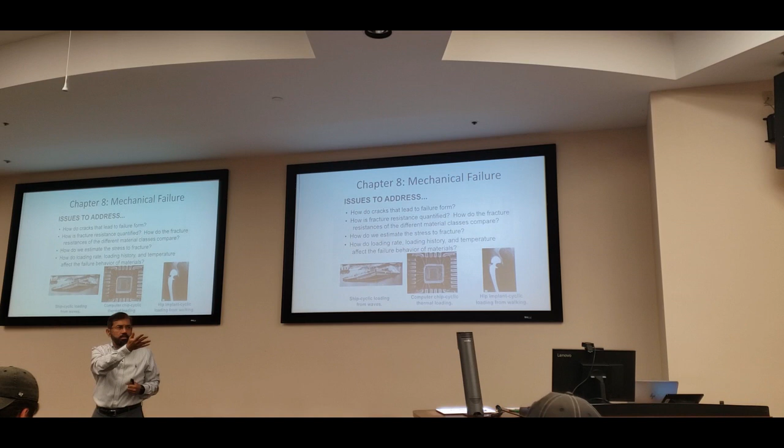So the exam is on Thursday, right? Are you prepared? I just got done studying last night. Okay, please study for it, it's so important. Your exams carry more weight, right? So please study very well. This is the time you can make up this exam. If you are behind, I told you - if you're below 60%, you should be very careful. You have 2 more exams and quizzes to go, so you need to make up with those exams and the homework.

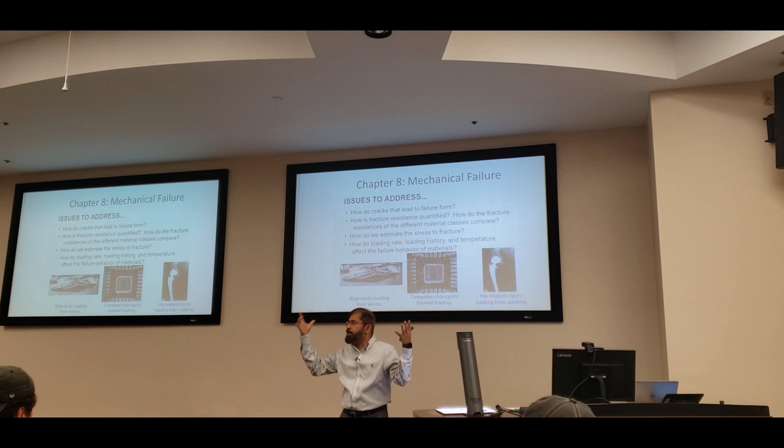Today there are 3 chapters - the syllabus covers 5, 6, and 7 for the exam. But this is also a very important chapter - mechanical failures. Why it's so important is, as I always say, as engineers you need to design structures which last, and not only last, but are safe. What are the parameters why materials can fail? If there is a fracture, a flaw, or a defect present in the material, how can that deteriorate? We'll see some examples. These are so important for aerospace - when you hear about problems with Boeing, that is the struggle. You need to be very careful.

What is another important factor? As aerospace engineers you should be aware of these things - stress and strain, to check whether your aircraft is well and good. Very important factor: always remember regular maintenance, regular servicing. That's what you're going to learn today - why regular servicing is important. As engineers you must know this. Also, what materials do you need to choose to design your aircraft? We've already learned the transition from early materials to what we use right now.

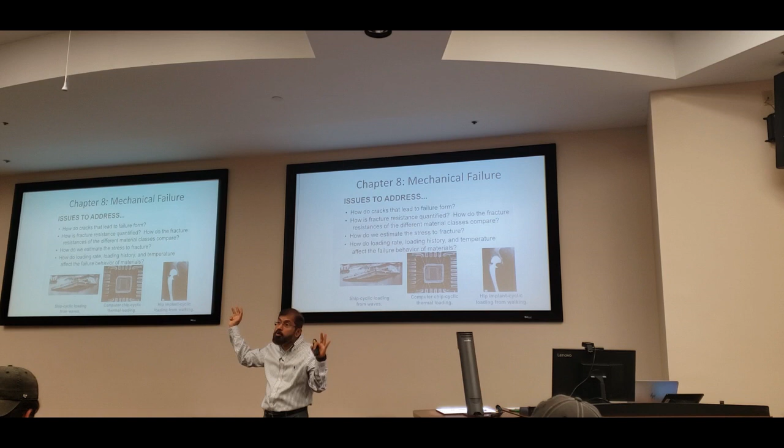There can be different types of material - one can be ductile, another can be brittle, and materials can be in between with all those properties. So material selection is a very important factor. Agree? Yes, material selection is very important. And defects in a material - you cannot avoid it, right? There can always be some defect. Even a scratch on the surface can be catastrophic sometimes. How? We're going to learn today.

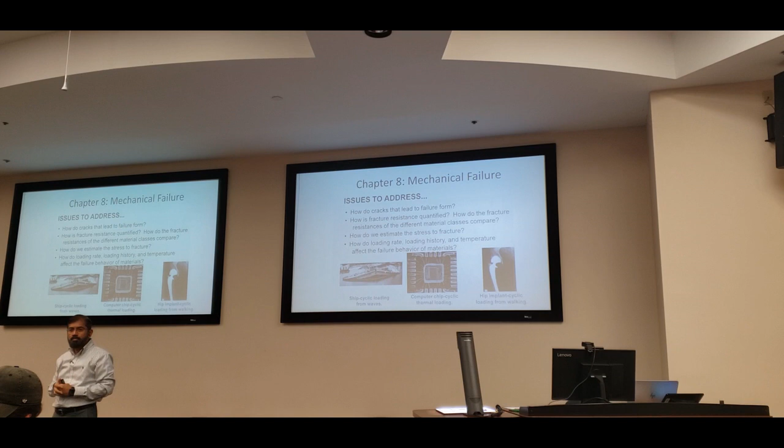If you look at this, what cracks lead to failure? Remember, there can be different types of failures, and there's a failure mechanism itself - how failure propagates, or how cracks propagate through your material. That's the important thing. Depending on what type of material you have, whether brittle or ductile, it differs. Ductile materials are forgiving materials - we can get a warning. There is always a warning for ductile materials. But what happens with brittle material? It fails right away - it cracks, that's the problem. It fails right away with no warning. So for forgiving materials there can be a warning, and a warning is always better than a sudden failure. That warning is important.

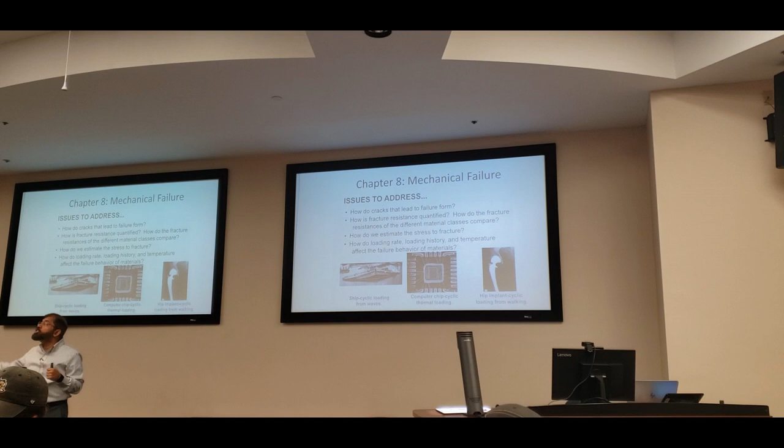What is another important factor - the ductility changes with what? Environment. Temperature is one factor, and another factor is environment - what medium, the surface conditions. Do you agree? Because in salty conditions there can be corrosion and so many other effects. Whenever there is corrosion, a pit is formed - a pit, a small hole can be generated, and that small hole can be a defect in your system.

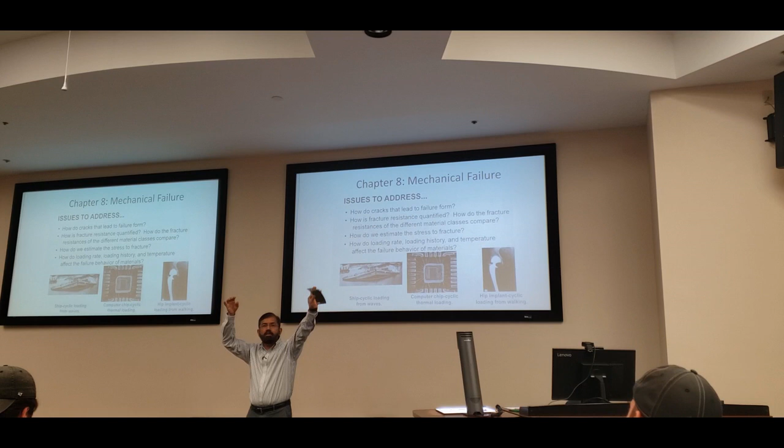Now I'm jumping a little forward, but you see a plastic coated paper - it's not that easy to tear this one, look at this. But if there is already some type of defect in the system, you can easily tear it off.

What is the message there? If there is a cut, you have seen that in snack packs, it comes with a cut. Have you ever thought about why there is a cut? It's easy to tear it apart, right? Whenever there is a cut, you can separate them very easily.

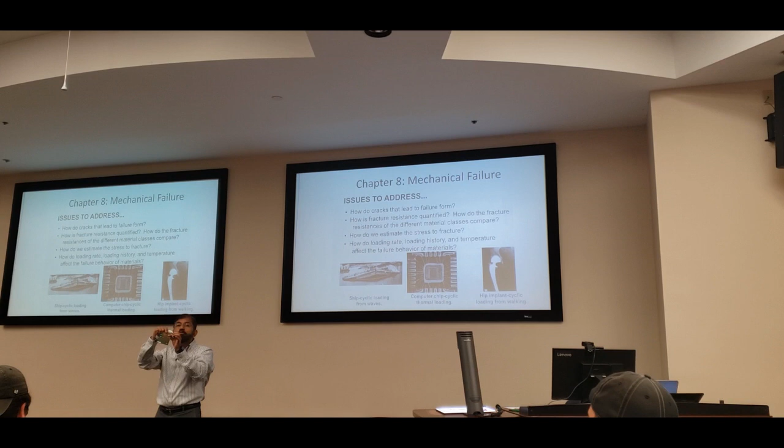One of the rare occasions where a crack is desirable. That's the take-home message: whenever there is a crack present, with lower applied stress, you can separate it. That means it can propagate much faster when there is a defect or crack in your system. That is the message. Whenever there is a crack or defect in the system, the applied stress can be amplified. You need to remember that.

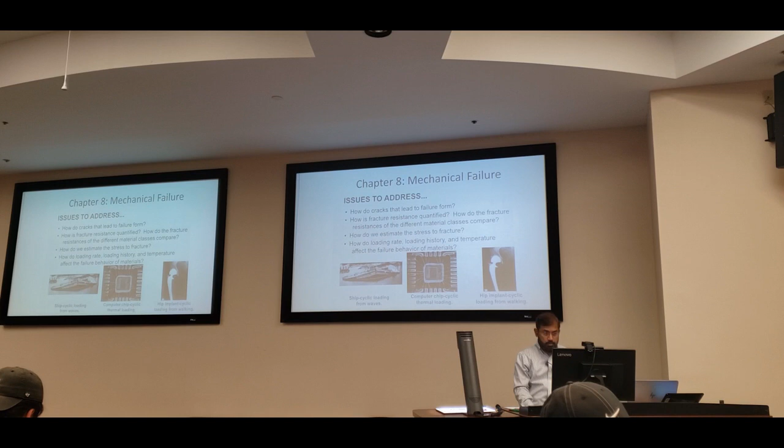So that's what we will talk about today. Look at this tanker, this is an oil tanker. I think after World War II, in the 40s or 50s, I don't remember the exact time, it split into two pieces. You see, and it was buffeting, and that split was through its girth, and it was buffeting in the sea for quite some time.

And the sea has different temperatures, right? Sometimes the temperature is very cold, sometimes not that cold. How it happened is a small crack started on the girth of that ship. And as it buffeted through that sea for so many years, what happens? That small crack expanded, and finally it ended up splitting the tanker into two pieces.

So the reason is the temperature. Whenever the temperature changes for your material, there can be a transition from a ductile material to a brittle material. Remember that, the temperature condition. So that's what happened in this case.

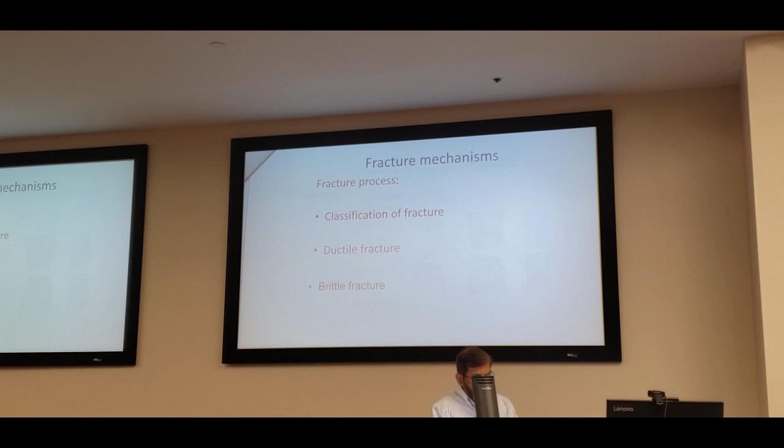So fracture mechanics is a branch of engineering itself, within materials and mechanical engineering. What are the classifications of fracture? You can see the different types: one is ductile fracture, another is brittle fracture, and then there's the fracture process.

Initially there should be a crack formation, and the crack formation is followed by propagation, crack propagation. So how do we classify a fracture? It depends on the ability of that fracture to propagate - that is the ability.

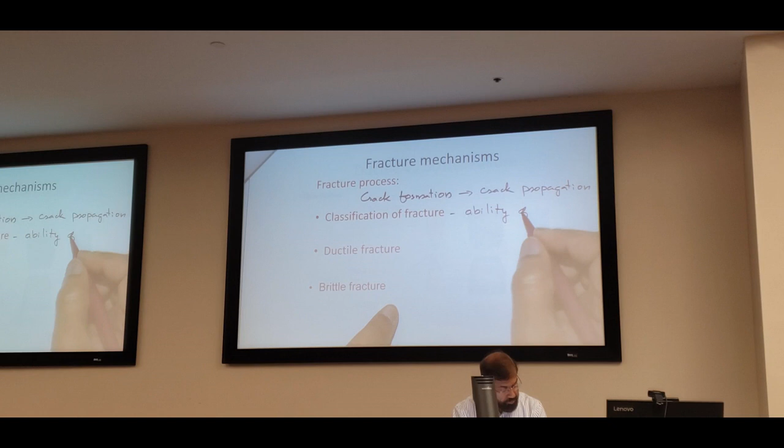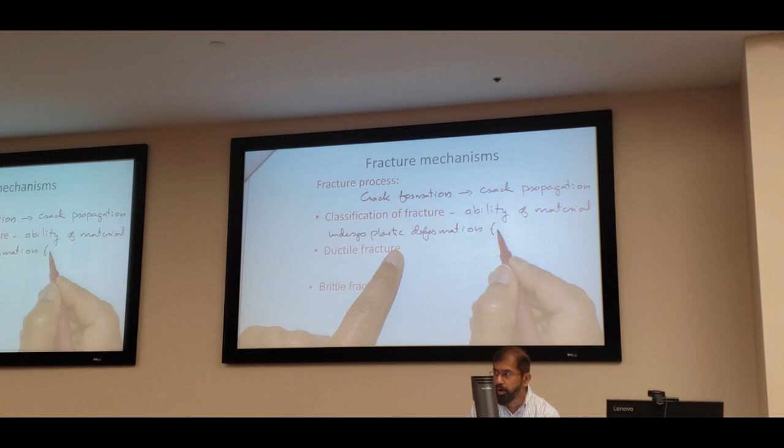This is the ability of material to undergo plastic deformation. What is the meaning of this? Plastic deformation, permanent deformation - ductility, right? Plastic deformation means ductility of the material.

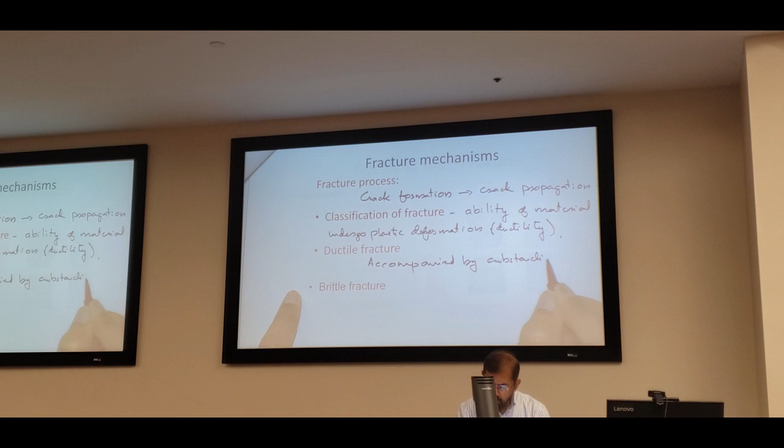So ductile fracture is accompanied by substantial plastic deformation. Here, brittle fracture shows little or no plastic deformation, and it can be catastrophic too.

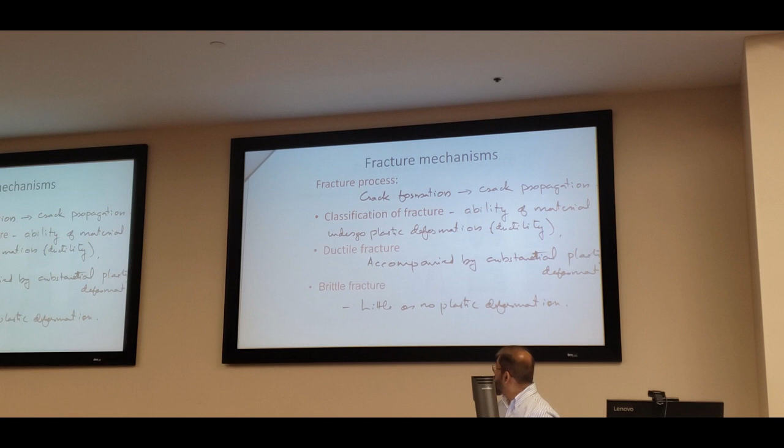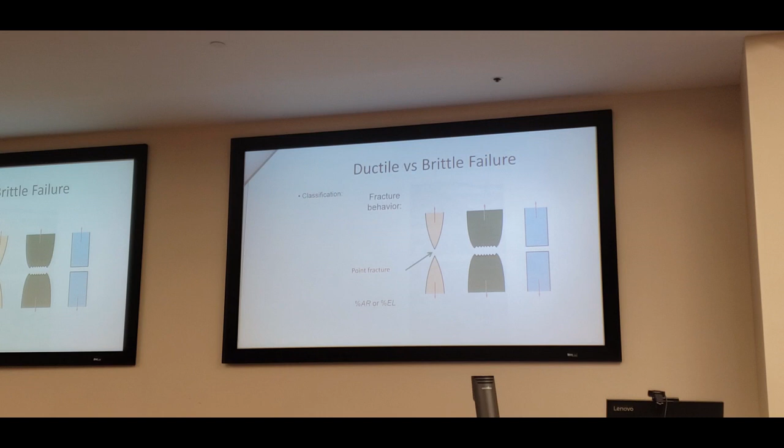If you look at a given sample - have you ever looked at your soldering wire, the material used to solder? If you pull it and apply a tensile force, you can see it coming out like plastic, and it tapers, finally coming to a point where the fracture occurs. So we can say that such a material is very ductile - a highly ductile material fails like this, coming to a point where there is separation. These are highly ductile materials.

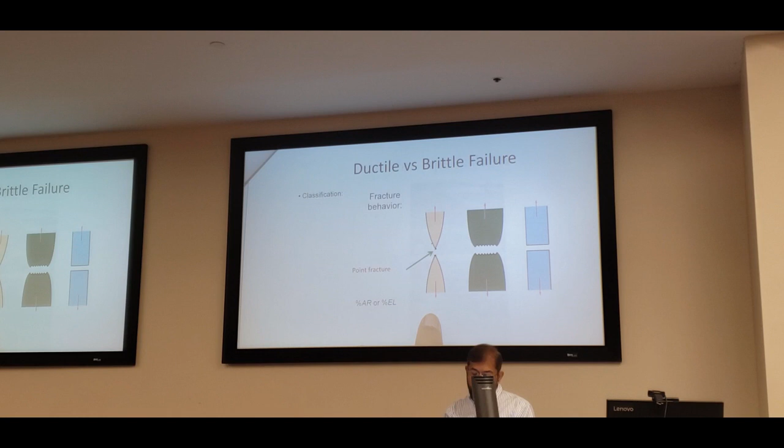For a moderately ductile material - highly ductile and moderately ductile - you can see these types of irregularities forming on the surface.

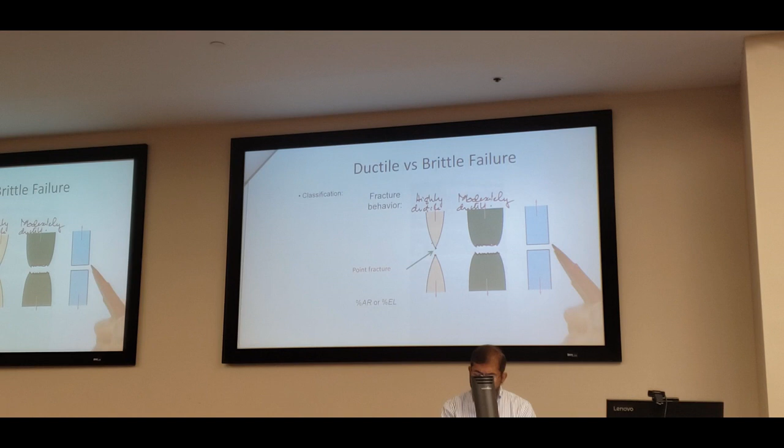And when you have a completely brittle sample, what happens? Your two ends look like that - flat, without tapering.

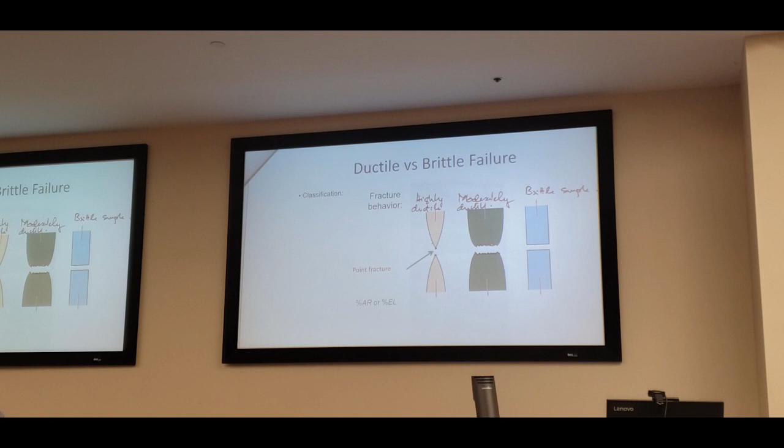So how can we define fracture in simple terms? We can say that imagine these are two pieces, and you are separating them - there is a fracture. There should be a static stress or a slowly changing stress on the sample, and it is separated into two pieces under that static or slowly changing stress. That is a fracture.

And how can we quantify this fracture to some extent? We know that fracture is based on the ductility of the material, right? Plastic deformation - so plastic deformation and ductility, how do we measure the ductility of the material?

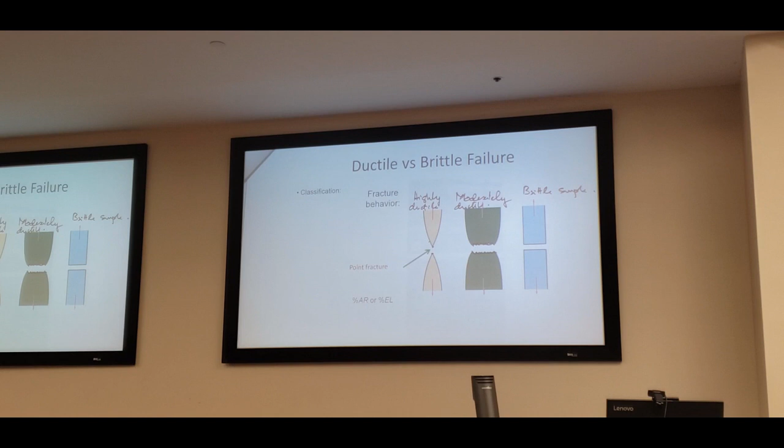Percentage elongation or percentage reduction in area. Prepare for your exam - please prepare for your exam. In the last chapter, or the chapter before that, we learned about it. What is ductility? Ductility is the percentage elongation or percentage reduction in area. Percentage elongation is the change in length over original length. Percentage reduction in area is the change in area over original area. That's the percentage reduction in area or percentage elongation.

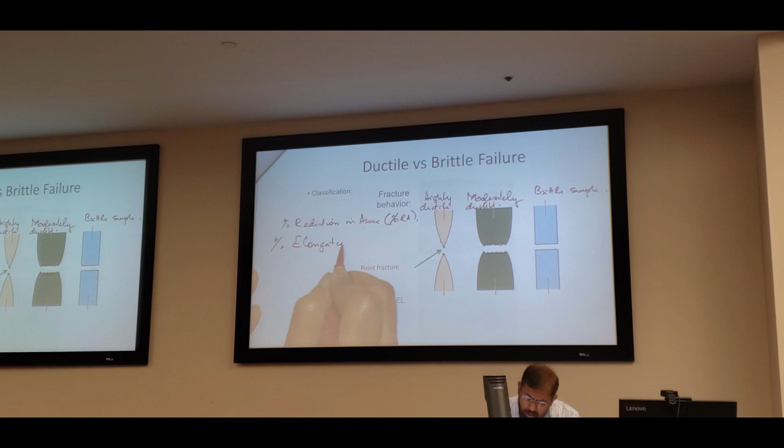See, that is the difference. Whenever you have highly ductile material, you have this type of high percentage reduction in area or more percentage elongation. When you have moderately ductile material, you can still see necking, neck formation. And finally, what you see at these edges is like a fracture in the form of teeth, teeth-like structures at the fractured ends. So here you can see more sharp ends. Got it? So far so good, right?

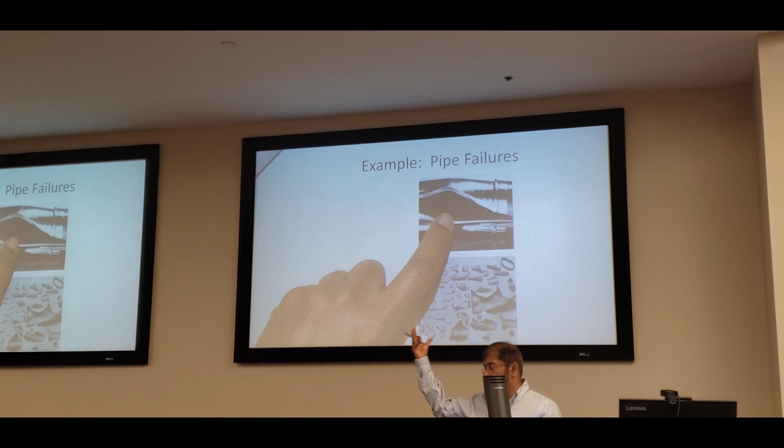And you can see in the second case, this is an example of brittle fracture, which is shattered into pieces. A very good example is ceramic. What happens if you drop a ceramic plate on a tile? It shatters. That is a very good example of brittle fracture.

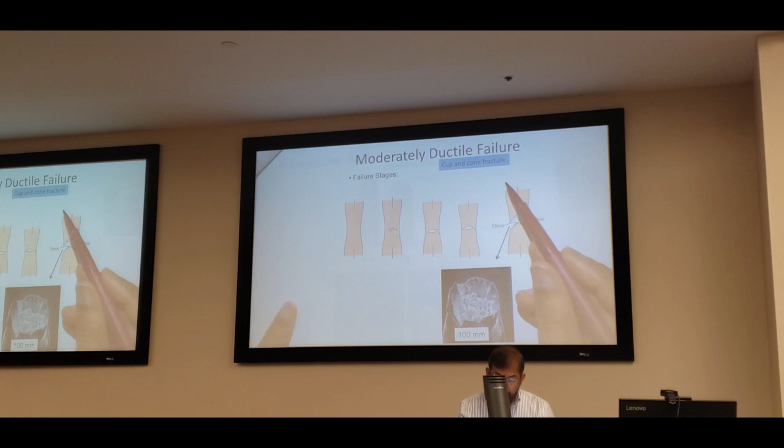Now if you look at moderately ductile failure, I already talked to you about this. This is the sample and this is the tensile axis. Initially this is the neck formation, we talked about it. You apply the tensile force onto the sample, your dog bone sample, you have seen it. We have seen the UTM video, and you apply the tensile force, and there is neck formation. Actually, within the material, what happens is you have this type of small void formation. Voids are formed.

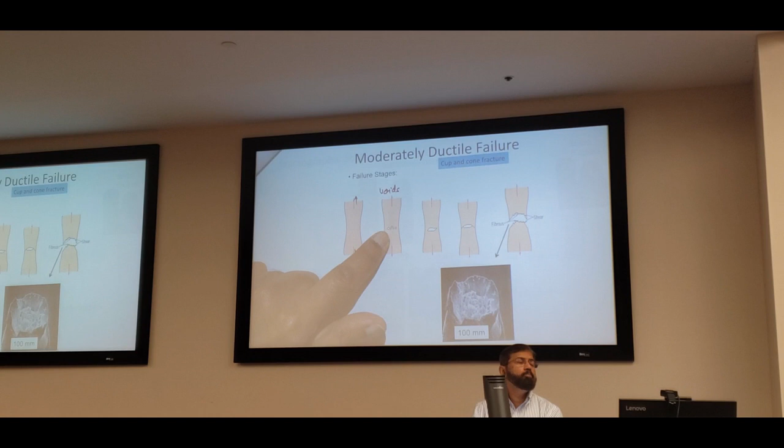Small voids are initially formed, and these voids are formed due to the breaking of the bonds. So if you keep on applying that static force, static stress, what happens? These holes, they coalesce. Agree? This coalesce.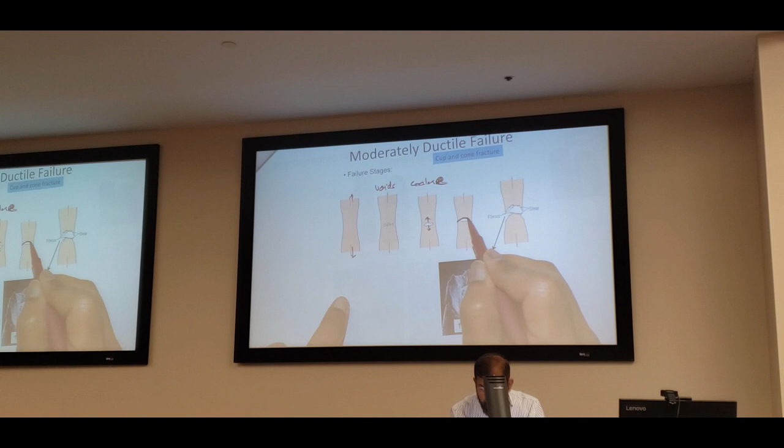And what is this angle to the applied stress axis? What is this angle? What should be this angle? You must remember these things, this is so important, you know, in the future also. 45. Who said 45? Why 45?

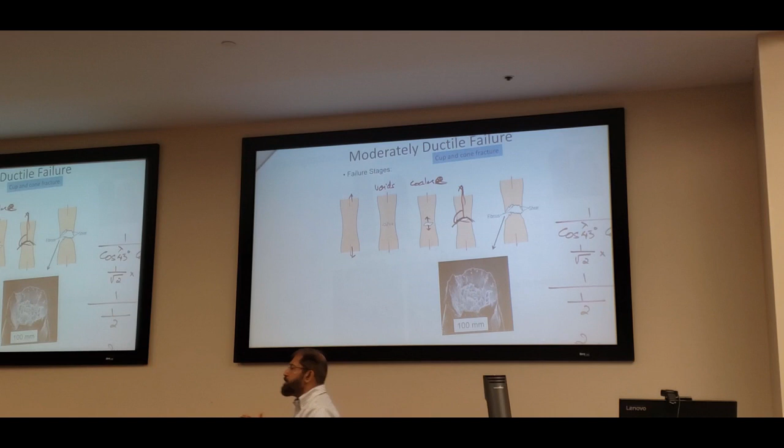45 degrees, because that is the optimal crystal plane angle. When both applied stress... in fact it's 2 times the applied stress. Remember that 45 degree. It basically comes from 1 over, 1 by square root of 2, cos 45, and cos lambda into cos phi. The equation finally comes to 1 over cos phi 45, cos 45 degree into cos lambda and cos phi 45. You must remember this. And what is cos 45? 1 over square root of 2. Cos 45, 1 over square root of 2. So it should be 2 times the applied stress. Yes, it should be 2 times the applied stress. That's the reason why it happens. And remember when I showed you that UTM, I told you, you should be careful, you should see that one. You should remember what angle the crack propagates at.

Okay, that is so important. That's the reason why it happens at 45 degrees. The lip is here at the 45 degree angle, because that's where the slip occurs. Remember, there are different planes, and one of the planes feels the maximum applied stress and starts slipping. That's the reason for this 45-degree angle.

You can see that these are the fibrous ends, so this is where you have the fibers. These are moderately ductile failure. Moderately ductile failure - it's always like this in a test where you're just doing tensile strength, applying stress in parallel.

Yeah, parallel - we apply that parallel stress, and there are two components. Whenever the phi is 90 or lambda is 90, what happens? There is a brittle failure. If the planes are perpendicular to the tensile axis, or parallel to the axis, or perpendicular to the axis, then there is a brittle fracture in that case.

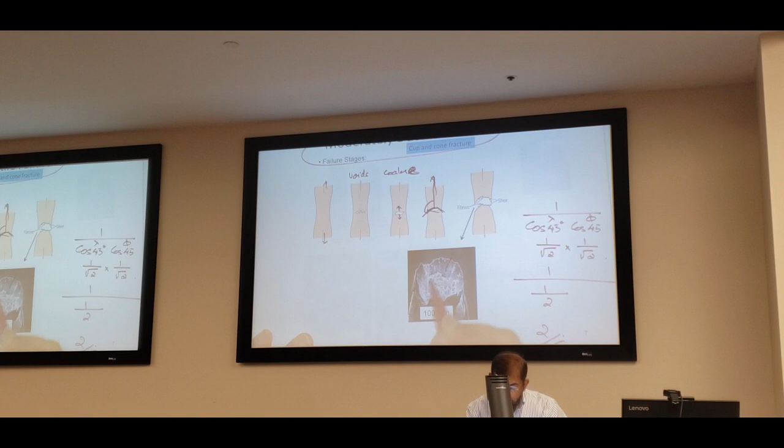This is basically a moderately ductile failure here, and this is an actual cross-sectional area of your sample. You can see the lip is 45 degrees, and you can see more grainy structure on the surface, and that is the reason why you have a moderately ductile failure. So you can see this is called a cup and cone fracture.

Look at this one. This is a cup - this part is a cup, and there is a cone. Since this is a cup, there is a cone here. The other side should be cone, and that's the reason why it is called a cup and cone structure. So the cup region is shown here where you can see the spherical dimples, and where the cone is, at the lips, you can see the elongated C-shaped dimples.

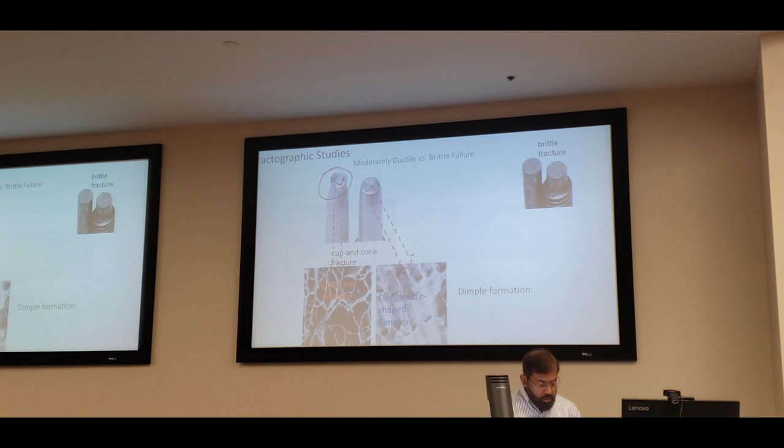So this is spherical dimples here on this side, at the cup side, and whereas on the other side you can see elongated C-shaped dimples. This is how you can analyze your failure. This dimple formation is a characteristic of uniaxial tensile failure.

Whereas in this case, for a completely brittle fracture, look at this one. What you see is not that angular separation or anything like that. You just see two surfaces, and you can see the grainy surfaces on the ends. You get it? Yes - this is the difference between moderately ductile and brittle fracture.

So this is important, and when NASA has some problems, some issues, the first thing they do, one of the important things, is get those samples - get the failure samples, and the filings and whatever particles you can collect from there. This is exactly what they do, and they analyze it to learn how the failure happens. So that's the importance, that's why it's so important for you guys.

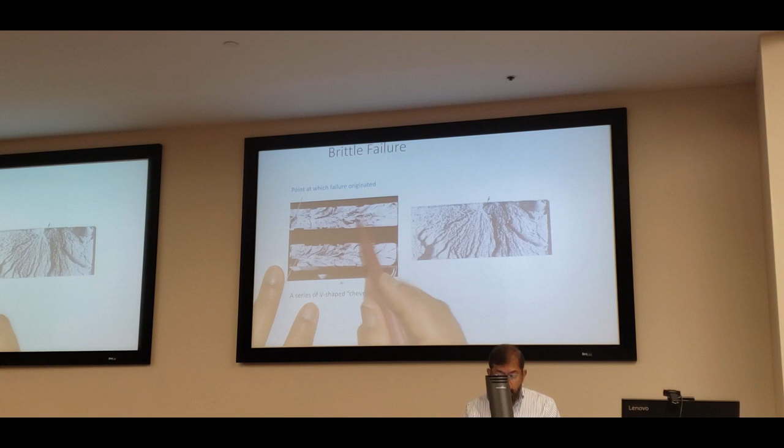This is where you have a brittle failure. You can see that you don't see this type of cup and cone structure or anything like that. Remember, this cup and cone structure is a characteristic of materials with moderately ductile failure, but for brittle failure, it looks like this one. If you look at some brittle materials, typically for steels,

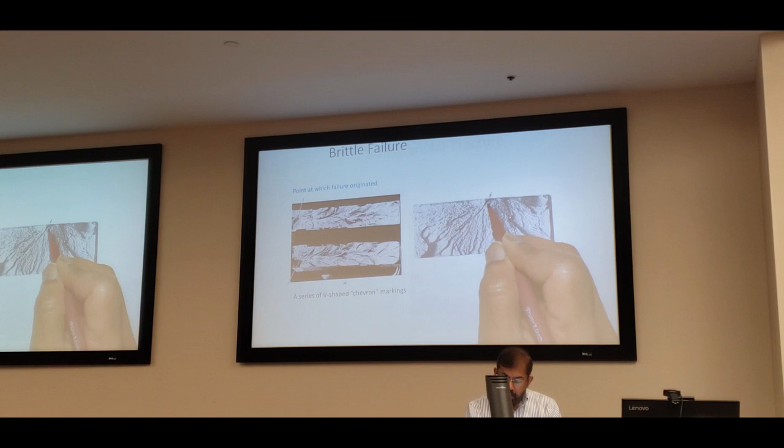you can see this V-shaped or chevron markings at the point of failure. The point where it originated - there might be a sand particle here - and then it propagated, and you can see all the V-shaped markings there. In this case also it's a fan-like appearance, with some defect somewhere here that propagated like this throughout the structure. So this type of failure you can see.

And if you look at this one, look at these surfaces - if this is a sample of this type, what is the angle? This is your tensile axis. Professor, could you slightly pitch that?

You know, the problem is this is not the right size here, so whenever I move it, you don't see it. That's the issue. Otherwise it should be this good. But even in this case, if I move to one side, it changes.

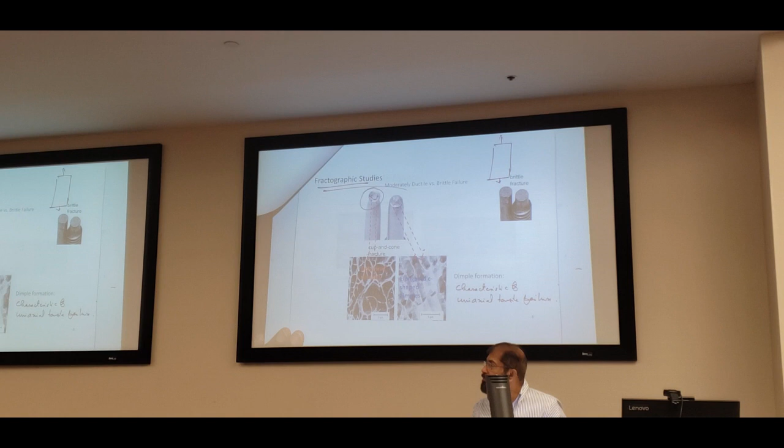I don't really understand the full difference between ductile and brittle failure. Is there a certain point where I just don't understand the separation as well? Yeah, I'm coming to that.

Okay, look at this sample. This is a sample like this one. You are applying a tensile force, and I just talked about it. For a brittle material, brittle fracture, remember in the last chapter we learned about it - what is the angle from that equation cos phi into cos lambda, 1 over cos phi into cos lambda. What happens to that one when it is 90 degrees? Brittle fracture. So it should be a brittle fracture, meaning in this case it's a 90 degree fracture.

You see this 90 degree here - you have this applied stress, and whenever your stress direction is like this one, and your orientation of the plane is typically like whatever orientation you can have, but for a brittle fracture it should be 90 degrees, yes?

90 degrees for the tensile axis - not the normal angle, right? And the plane, if it is parallel to this one, the most favorable plane is parallel to this one. Assume that this is the parallel. So normal to this one is this, right? And therefore this angle is 90 degrees.

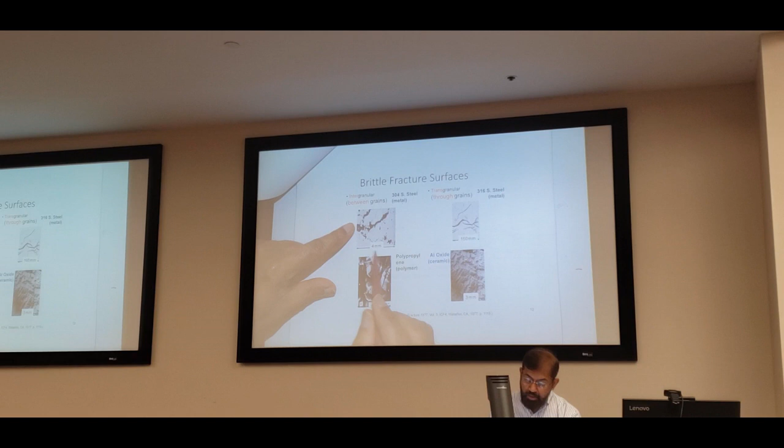Under a scanning electron microscope, you can see the surface of that one which is passing through the grains. These are the properties of different types of material. Whenever you have a certain type of steel, you can see this type of failure mechanism. These are some very good examples for intergranular failure between the grains in a 304 stainless steel metal. So you have these things here, and transgranular means it is through the grains - you see this is the grain and it happens through the grain. So these are intergranular and these are transgranular.

Aluminum oxide, ceramic - the failure happens like this. Okay? Just to see the difference between the different types of failures.

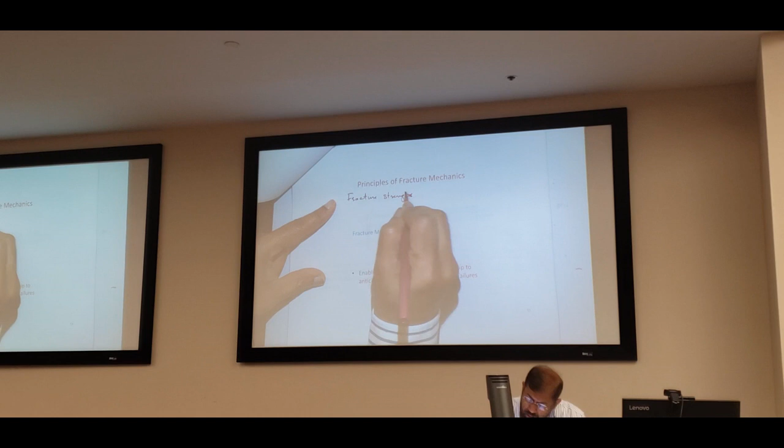So the principles of fracture mechanics is, basically the fracture strengths are much less than the theoretical strength. You can calculate the theoretical strength of the material if you know the bond energy, and from that calculation you can find the fracture strength of the material. It has been observed that the actual strength of these materials is much lower than that, and it is basically because of imperfections in the sample.

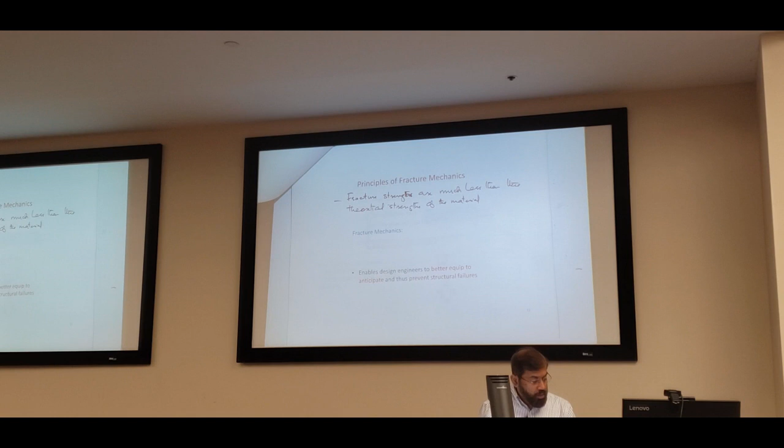So the theoretical strength doesn't consider all the defects present in the material. There can be so many defects in your material, right? It doesn't consider all the defects, and that's the reason why the fracture strengths are much less than the theoretical strength.

So fracture mechanics is the quantification of the relationship between material properties, stress level, presence of crack producing flaws in the material, and the propagation mechanism, and so on.

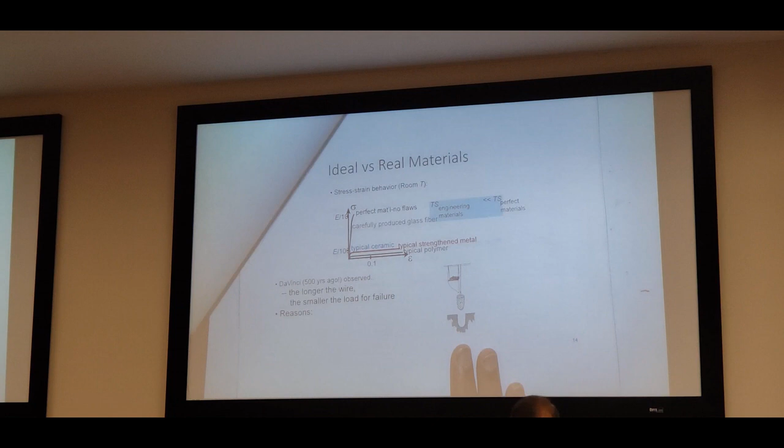And you can see that this has been noticed long back. Da Vinci, 500 years ago, himself observed that when the rope is longer, the chances of failure increase or decrease?

Increases. Can you go back really quick so I can take a picture? Back to the previous one? Yes, please. Thank you.

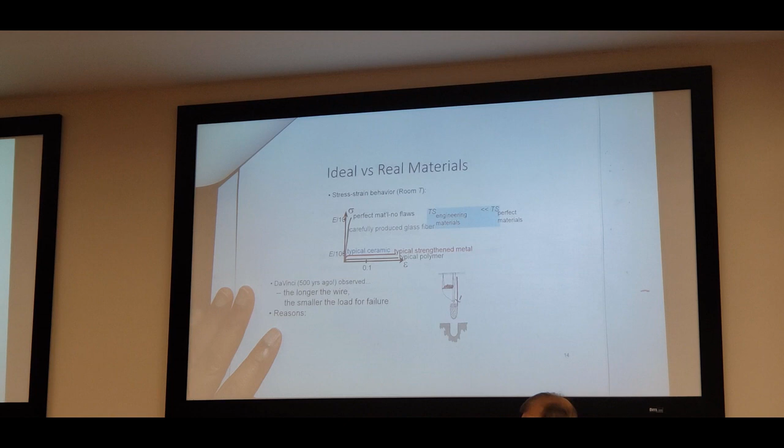So basically, as the length increases, what happens? The number of failures, the number of flaws increases. Agreed? Number of defects increases. So as the number of defects increases, what happens to the mechanical strength of that material? Decreases. So he observed these things 500 years ago.

That is the reason why the longer wire has a smaller load for failure, because there can be a lot of defects in the sample, and it has a larger number of defects. So it can cause premature failure.

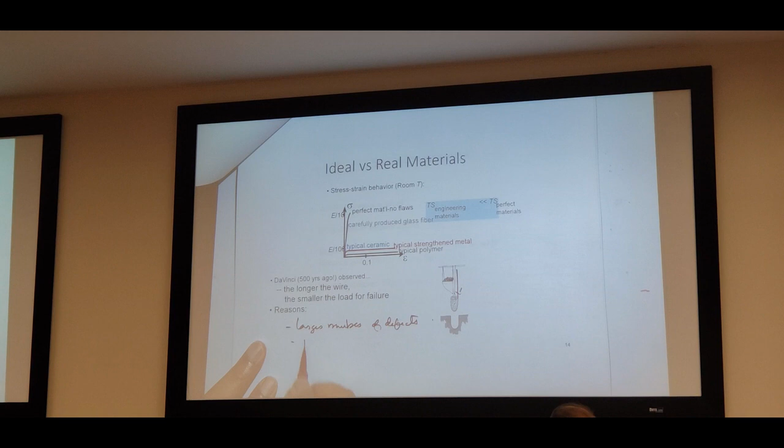So from this plot itself, modulus of elasticity, or applied stress versus strain - you can see that this is a perfect material with no flaws, and when you have a carefully produced glass fiber and a typical ceramic, what is the strength of the material? So the actual engineering material's tensile strength is much less than the perfect material. And remember, there is nothing like a perfect material - there can always be some defects in your material. So the perfect material here means the theoretical material without any defect.

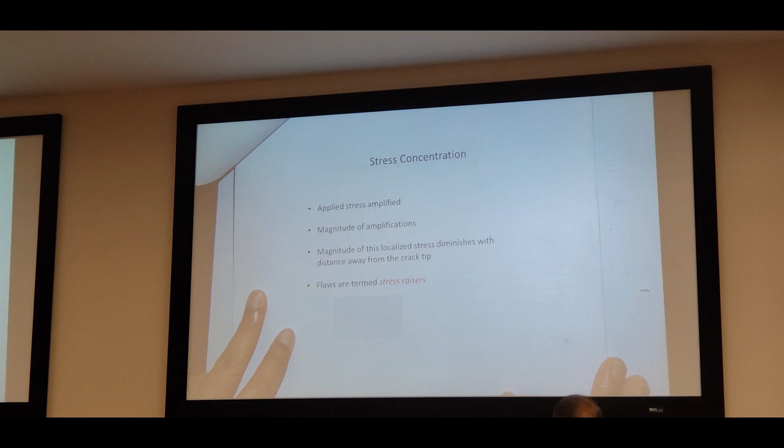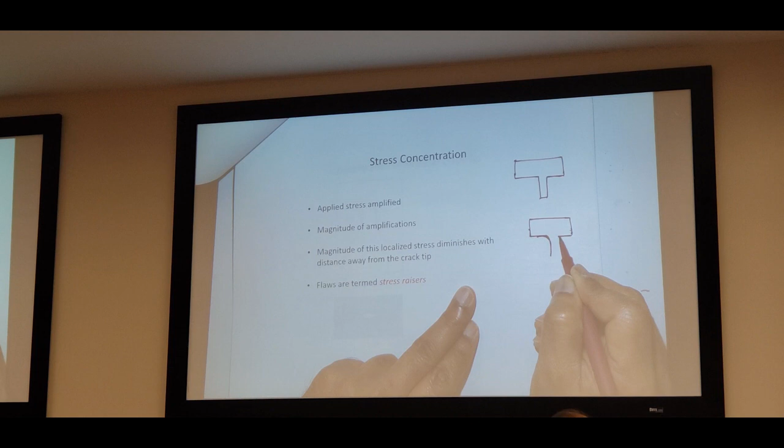So let me ask you this question in advance - I'm jumping ahead, but if you have a structure like this, where you have a joint, or a T-type structure, and another structure, this diameter and this diameter are the same, the cross section is the same, and all other factors are the same. There is a curvature here between this one and here, and there is no curvature here - there are sharp ends here.

My question is, when you apply a tensile stress onto the sample, some type of load on the sample, which one is stronger? The one with the curves, the one with the rounded edges? Exactly. Any other answer?

And why is this stronger? Yeah, it's - I'm not saying it's wrong or anything. Yes, with the first one. It was first like one? Yeah, it would cause a brittle fracture, because it's just straight, like 90 degrees, the corner, versus the other one - yeah, it's spread out.

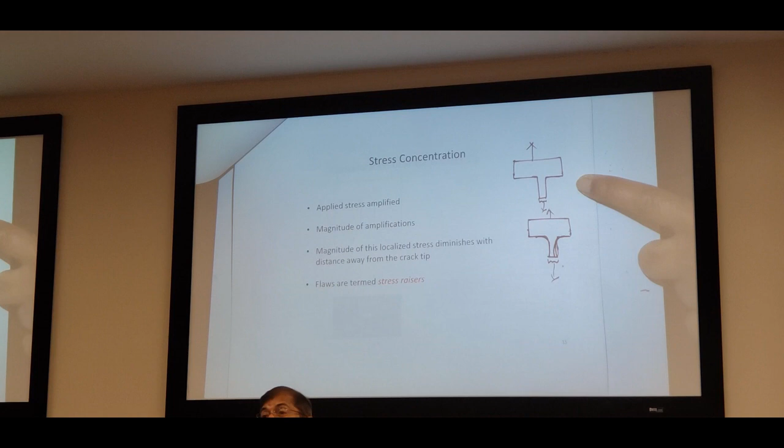Yes, again it's partially correct, with respect to that angle and those things, but whenever there is a defect in your system - we are coming to that, but that's the reason I am jumping ahead. So any other answer, but I will explain it only after the next few slides what is the reason, and you can easily see the reason. Any other answer?

You know, this is just to make you think. That's the only reason I am telling it right now. I am asking it right now.

Is it because it's already shaped in the way that it already wants to move in that direction, so it's easier to distribute our loads? That might be great.

Okay, any other answer? For the curved sample, there's less surface area, so lower concentration of defects along the surface of it.

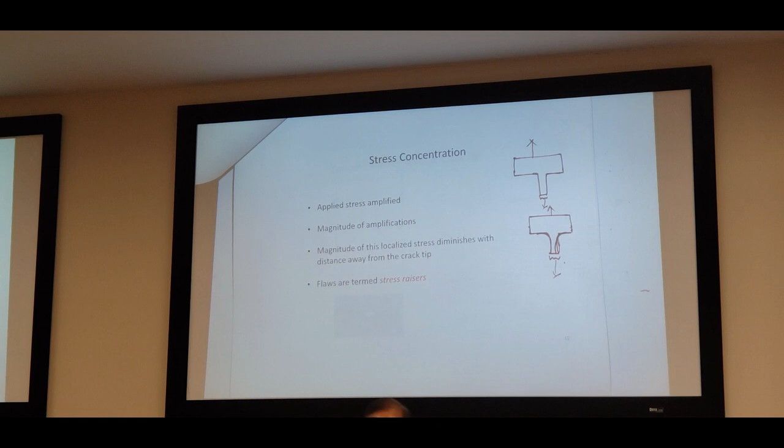We are not talking in terms of the surface area. Okay, not in terms of surface area. We are talking in terms of the angle itself, which I don't want to comment on, whether it is correct or not. That's the reason why I don't want to comment on it, whether with respect to that surface area and the defect, what you said, defect is more towards our answer.

But about the surface area, yes, surface area is important if you have defects on the surface of the sample. That's why I'm not saying it's incorrect, but if there are defects present, yes, it can be. The curvature, the surface area - what you said is true with respect to that. When you have more surface or more length, you can have more defects in the sample. But the actual answer is different.

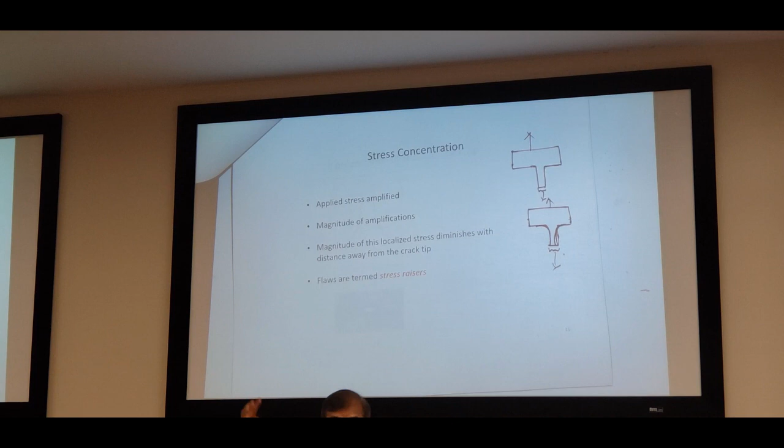And then the top one, there's a weak point in that corner. Okay, and then you're kind of transferring that. Yes, you are coming to that point, that's why I'm asking you. There is a weak point for the first one, right? And why that is going to be weak, we are going to learn this.

For the first one, those square corners can allow for a higher stress point, which can then allow, if any defects occur there, the corners to more easily allow that defect to propagate. Yes, these are all correct answers, okay?

You're coming towards that real answer, and what is the reason we are going to see in the next slide. So you have the applied stress amplified - forget about this one, okay, I just drew it there, that's all. But applied stress is amplified whenever there is a defect there.

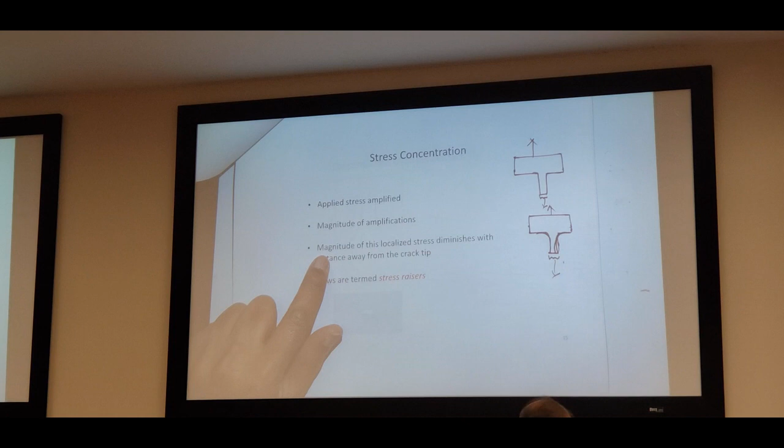And the magnitude of amplification depends on how much stress is concentrated and how fast your defect propagates - that depends on the magnitude of amplification. And this magnitude of amplification depends on how the cracks are oriented, and its geometry.

Okay, and the magnitude of this localized stress diminishes with the distance away from the crack tip, and flaws are termed stress raisers. Whenever you have a defect in your sample, that defect is called a stress raiser. The flaws are always termed as stress raisers.

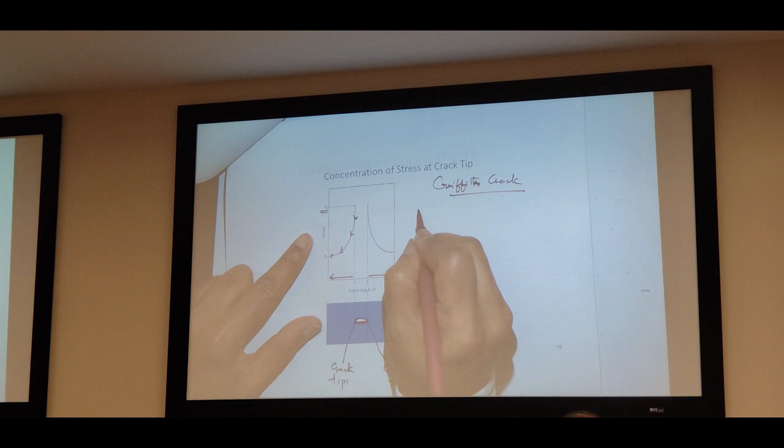And the maximum stress sigma m, that is the maximum stress sigma m, is equal to 2 into sigma naught into square root of A over rho t. And what is the rho t?

If you go to the next one, you can see the equation: sigma m is equal to 2 into sigma naught into square root of A over rho t.

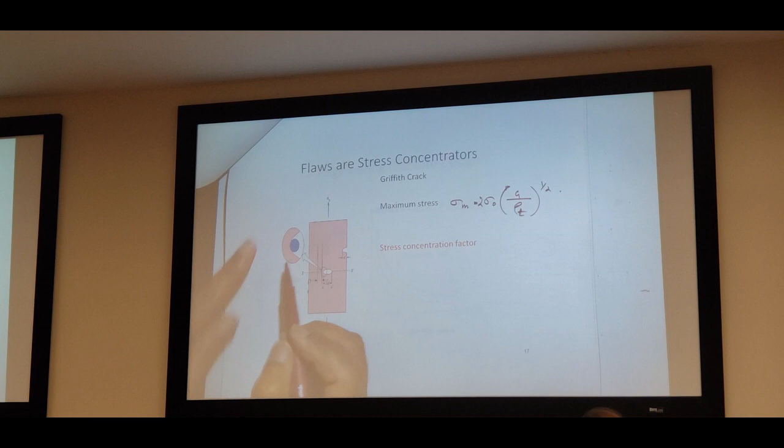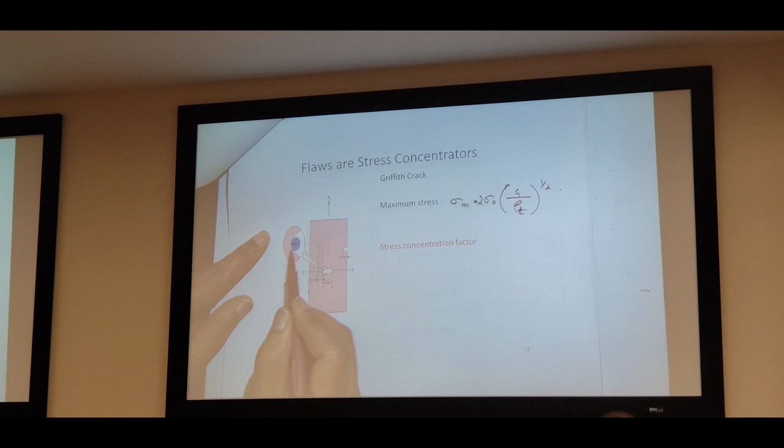And rho t is nothing but, you can see here, this is that crevice or the flaw. If you take that side and fit a sphere or ball there, the radius of that ball or sphere is rho t.

So what is sigma naught? The applied stress. And what is sigma m? The maximum stress, that is the magnified stress. So what happens as rho t decreases? Look at the equation. As rho t decreases, sigma m increases. Just that.

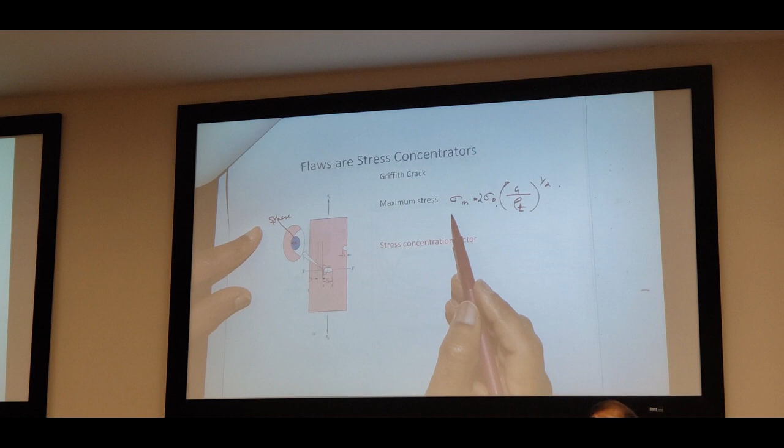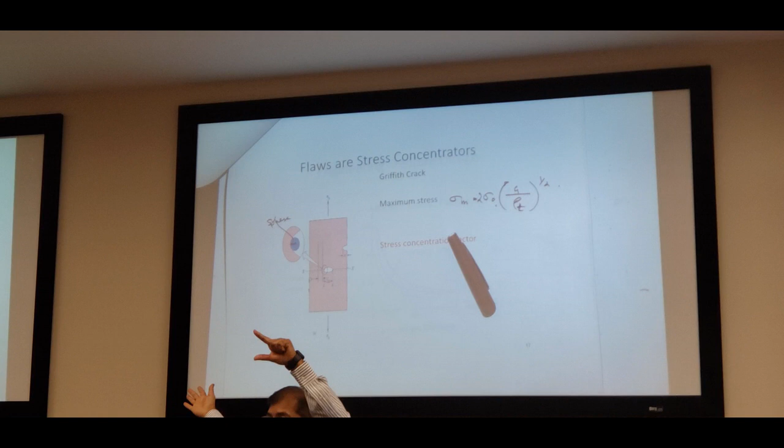Sigma m increases as rho t decreases, which means since this is the circle, this radius decreases. What is the meaning of the radius decreasing? Consider this, if you put a ball here, the radius of that ball is rho t. As the flaw becomes sharper and sharper, the radius of the ball decreases to zero.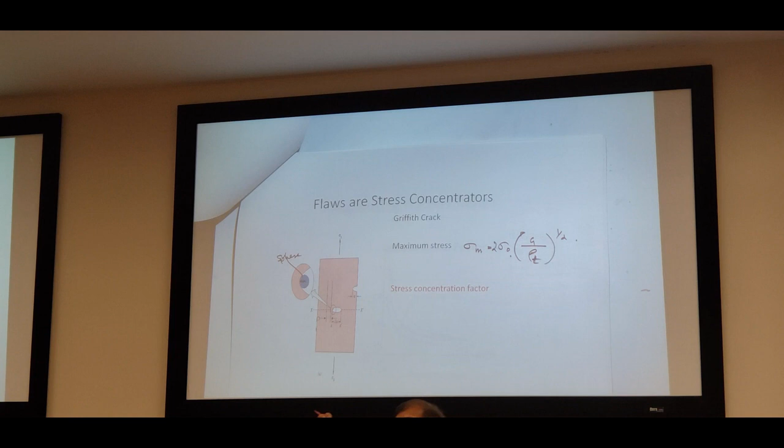So as the crack becomes sharper and sharper, the applied stress is amplified more and more. That is the meaning: as the sphere becomes sharper and sharper, sigma m, the maximum stress, increases. Therefore, as this becomes sharper and sharper, it requires less applied stress for that crack to propagate.

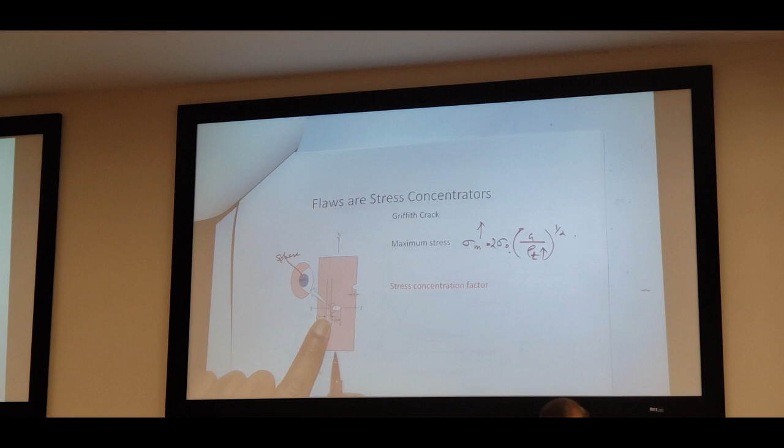You mean decrease, right, on the rho? Where, which one, the rho on the formula? Yes, decrease, right? Sorry, this is decreases. As rho t, that is the radius, decreases, sigma m increases.

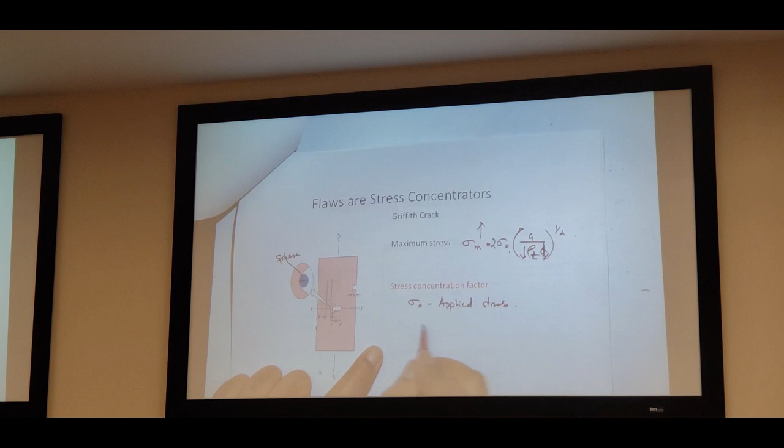So sigma naught is the applied stress, and sigma m is the maximum stress. What is A? Please listen here, I didn't define A. This is the length of that flaw. The total length is 2A for a completely inside flaw, where the flaw is completely inside the sample.

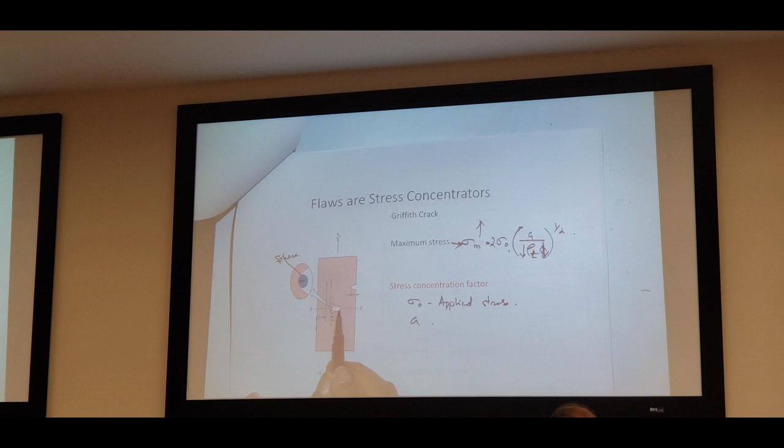So A is one half of this total length if it is a completely inside flaw. If it is a side flaw, this is the length of this flaw. Remember, in the problem, if it is given that the flaw is completely inside the sample, you must take one half of that length. If it is a side flaw, then it should be this distance itself, that is A.

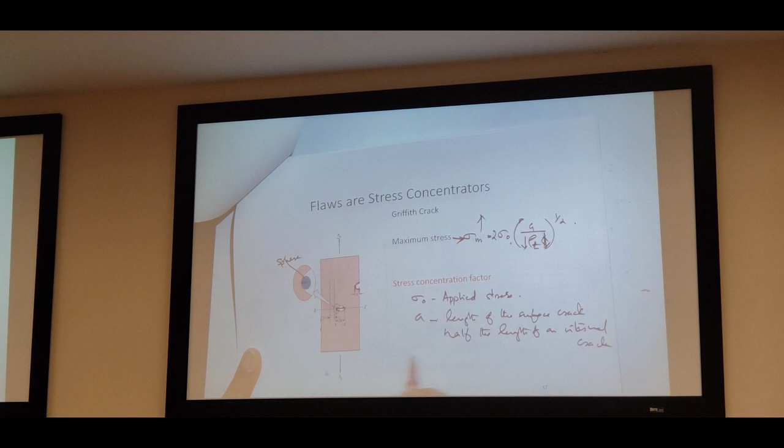So the stress concentration factor Kt is equal to sigma m over sigma naught, which is equal to 2 into the square root of A over rho T.

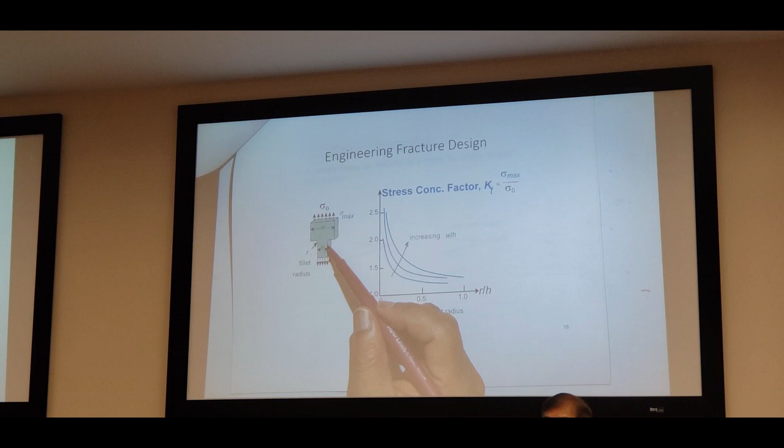Okay, so let's stop here and look at it, and now you can answer this question. It is there in the slides, you can go back and look at it. So please, just one second, look at this one, our previous question I had before.

So in the previous question, now you can answer why this is better, right? Less stress, because look at the sphere you can fit in there. This is sharper and this is much more curved, right? Agree? Yes. So that's the reason why you must avoid sharp edges when you design materials and structures. These type of sharp edges should be avoided.

So I will just go through the important slides very quickly, but I will upload it so you should be able to see it. We have already talked about all those slides, but only the very important ones. That doesn't mean questions are asked only from those slides, don't assume that, please don't do that, that may not be the case. You might get questions from other parts too, but in terms of probability, you have better chances from here. That's why we put it in. So these are some of the slides.

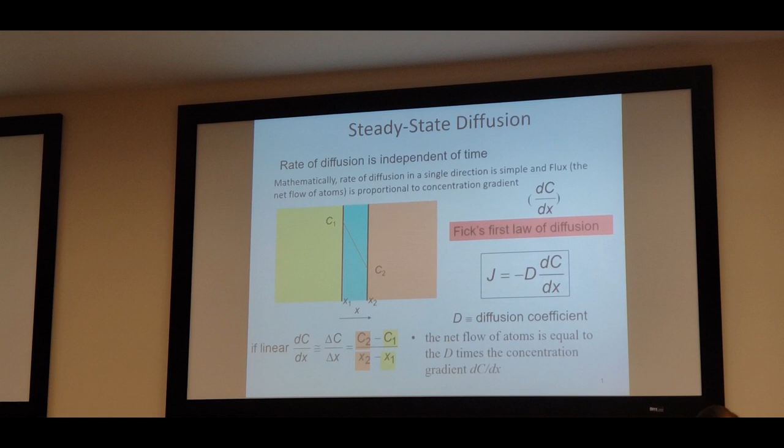The steady state diffusion and Fick's first law is very important. What is steady state diffusion and what is Fick's first law? And the factors affecting diffusion, temperature being a very important factor, and this equation D equals D naught times exponential minus Qd over RT. Taking the logarithm and solving it is also important.

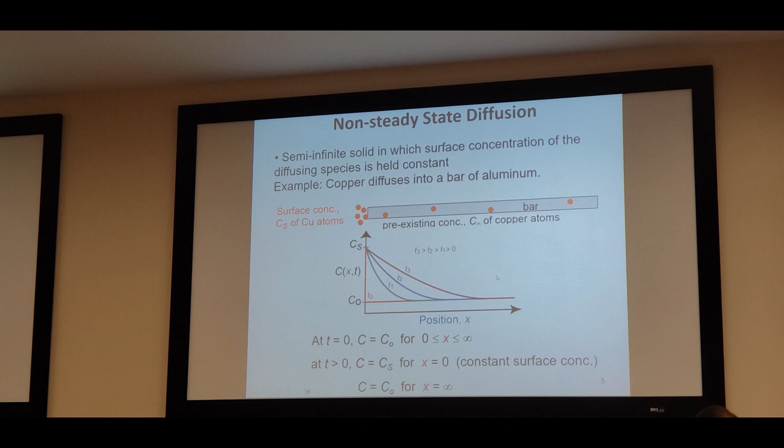Non-steady state diffusion is time dependent diffusion, unlike steady state diffusion. It follows Fick's second law, and this is important. There is a very good chance of getting problems from this part, asking you to determine the diffusion coefficient, temperature, or whatever is required. To do that, you need to know how to use the error function, so that is very important. You may be asked to solve for concentration C, or to determine X, T, or D, or whatever else may be asked.

The other topic is diffusion in semiconductors. What are the different steps for diffusion in semiconductors? What is the difference between pre-deposition and drive-in diffusion?

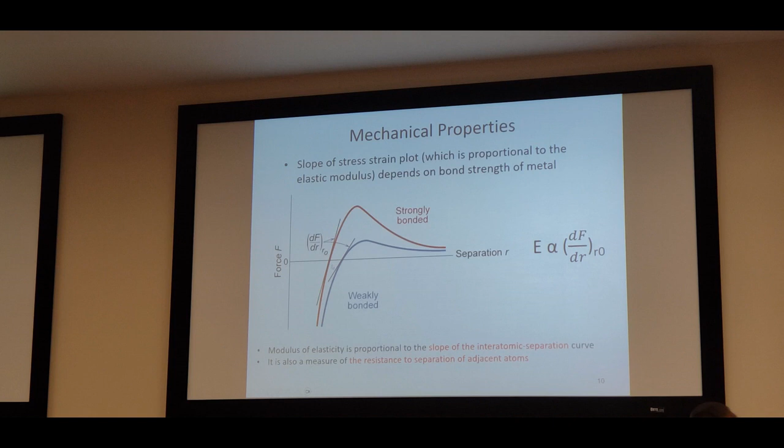Based on this, you can determine whether a material is weaker or stronger, depending on the slope here. This slope depends on the modulus of elasticity, so you can easily predict whether a material is stronger or weaker from this.

The other topic is Poisson's ratio, then plastic plus elastic deformation, and so on. Yield strength and ductility are also very important—this is the equation I talked about before—percentage elongation and percentage reduction in area. Why is ductility important? Because it gives a forgiving structure. Even though ductile materials may not be as strong as brittle materials, we prefer ductile material for that reason of being forgiving.

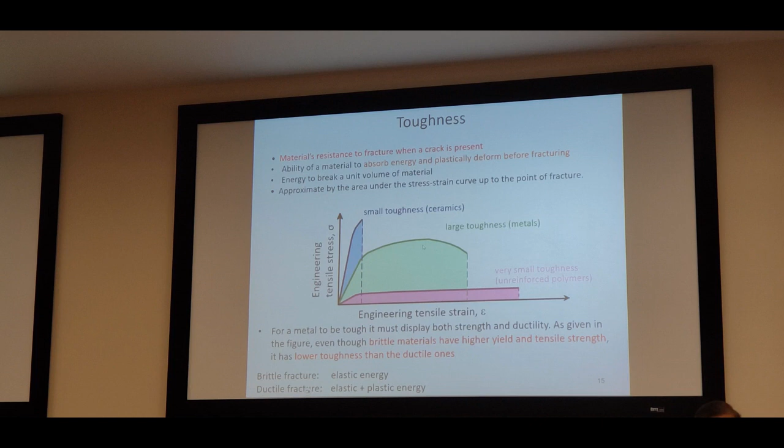Toughness is the material's resistance to fracture when a crack is present in the material. We will come back to this later, but the different types of dislocations and deformations, slip and slip planes, slip systems, and the difference between crystallographic structures like face-centered cubic and HCP—which one is more ductile and which is more brittle—depend on the number of slip systems.

The other topic is twinning, and the difference between slipping and twinning—these are two different processes. What is the difference between them, and what is the magnitude? All these things are important.

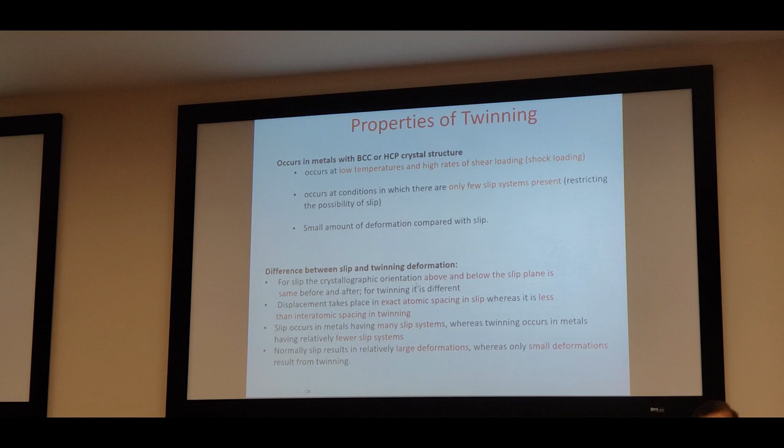Depending on two grains—for example, two samples given with two different grain sizes—compare the strength of the material. Questions can be asked like that: small grain size versus larger grain size, and why? Whenever you have such questions, you need to discuss the reasoning. If you do not discuss it, you will not get full points. Just saying one is stronger and the other is weaker is not enough—we expect you to know the reason, which is why that question is there.

Whenever you include a figure, the graders are pleased, because they can see that you know the facts. That's why including a figure makes it easier—a figure can speak a thousand words.

The other topic is solid solution strengthening—what are the different methods for strengthening materials? And strain hardening—what is strain hardening and what is the reason for it?

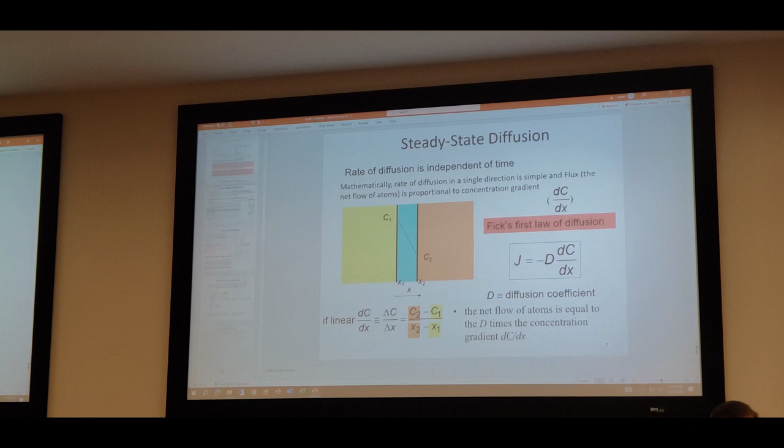The other topic is heat treatment—what are the different heat treatments, why do you do heat treatment, and what happens to the properties during that heat treatment. Those are also very important.